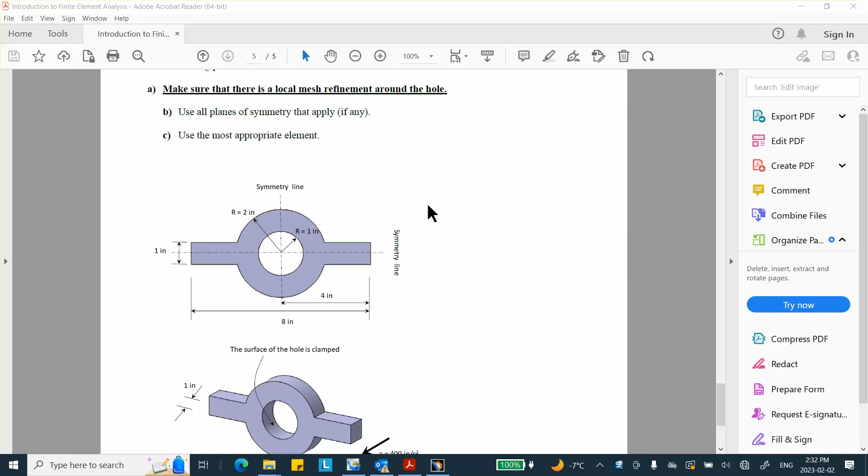Use as many planes of symmetry, use the most appropriate element. At this stage, the only element you know how to use that's appropriate is a solid element, not beam elements. As far as symmetry goes, think about this thing - it has only two planes of symmetry. In other words, you cut it vertically and you cut it horizontally, so basically we are dealing with one quarter of the geometry.

Okay, now let's go ahead and make it. As I said in previous cases, you can either make the whole thing and start cutting it, or you can make a quarter of it as you see fit, if that's what you want to do. So we start with a part file.

Immediately save it - file, save management - just like you have to do on the test, in the appropriate folder. There is a folder called Lab 5 Activity 5, so anything I do for this problem goes in there.

And on that vertical plane, I will sketch something that looks like this. You can always go and clean these up, but don't think about it too much because you can always go clean it up.

Let me see, actually, let me do the following - what's the best way of doing it? I can make a circle, two concentric circles, and then draw a rectangle and add them together. So let's see, circle, circle, circle.

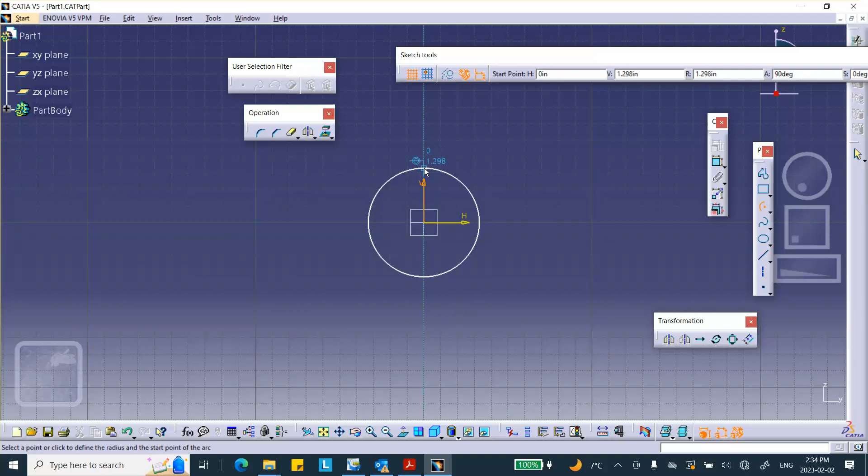One like that, that's the inside one. Another one like this. Let me try it again, like so.

Now we draw a rectangle, perhaps like this, and we're going to clean it up. Let me close this, by the way. If you want to do it some other way, be my guest, no problem. Use a quick trim to clean this up, so I'm going to get rid of this, and I'm going to get rid of that and that.

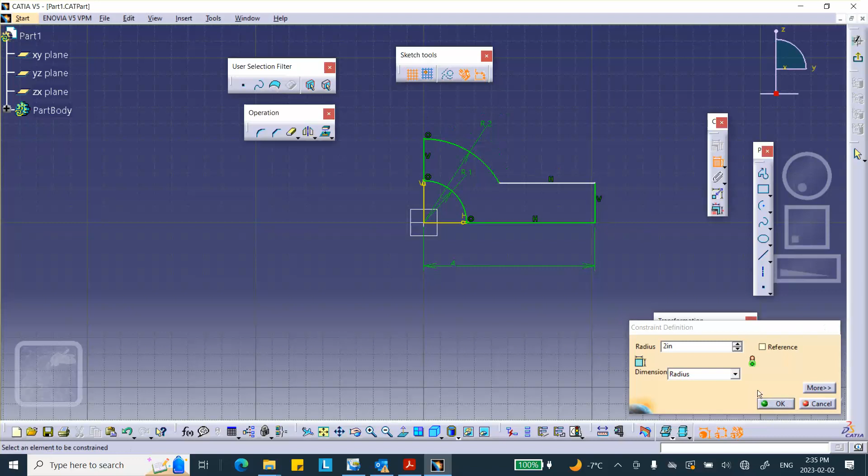Okay, let's put some dimensions here. From here to here is 4. The inside radius of this is 1, make it 1. And this outside radius is 2. I think what you see there is this, except this height should be 0.5.

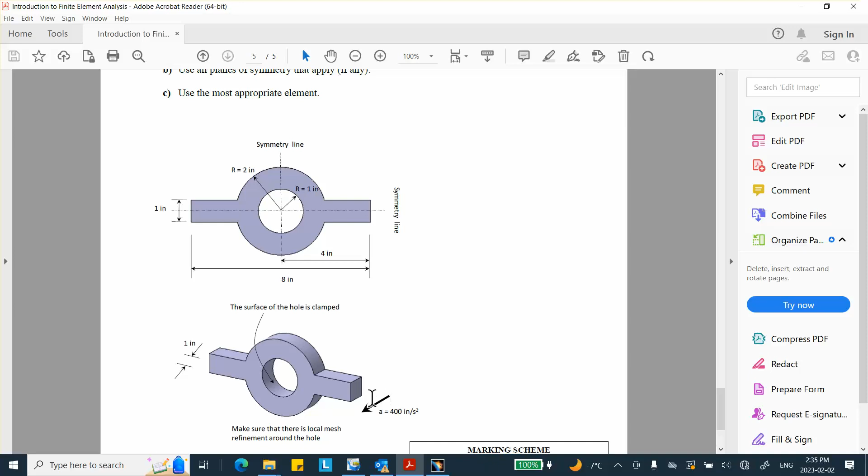There we are, exit, pad it by the entire amount, which is 1 inch. You cannot use symmetry by taking half of that thing - it's just wrong, simple as that. Think about it, it's wrong.

Good, so let's apply material properties on it - metal, steel, on that part. Okay, that's pretty much it.

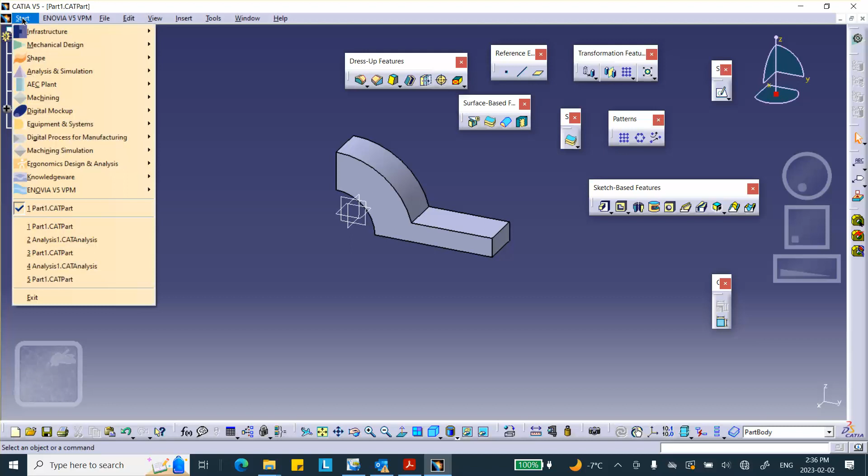So we're going to go to analysis and simulation, generative structural analysis. Let's put our planes of symmetry in different places. So surface sliders, we cut it here, and we know this is a plane of symmetry because we cut it. I put it both in the same constraints. Wait a minute, what do I do here?

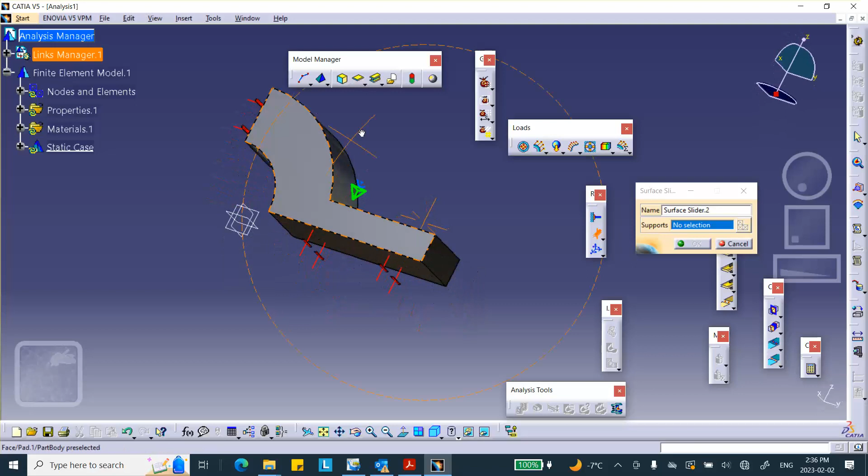Cancel. Did I have it here? Restraint, yeah, right here, two of them. Good, good.

The inside of this thing is clamped. That's what you're told. And one thing I forgot to do, it says to use local mesh refinement around the hole, so let's do that now.

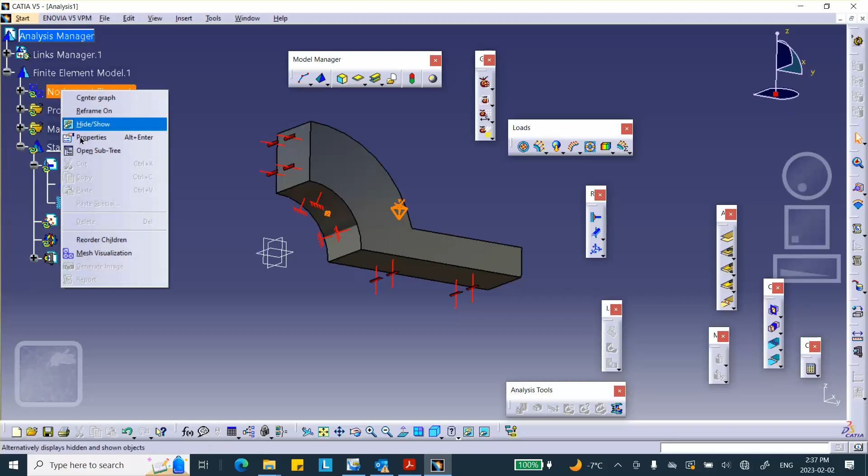This is local mesh refinement over here. If you look at your mesh, you see that is exactly the kind of thing you want. So find your mesh in this area, you can see that right there. All right, good, good. So deactivate this plot.

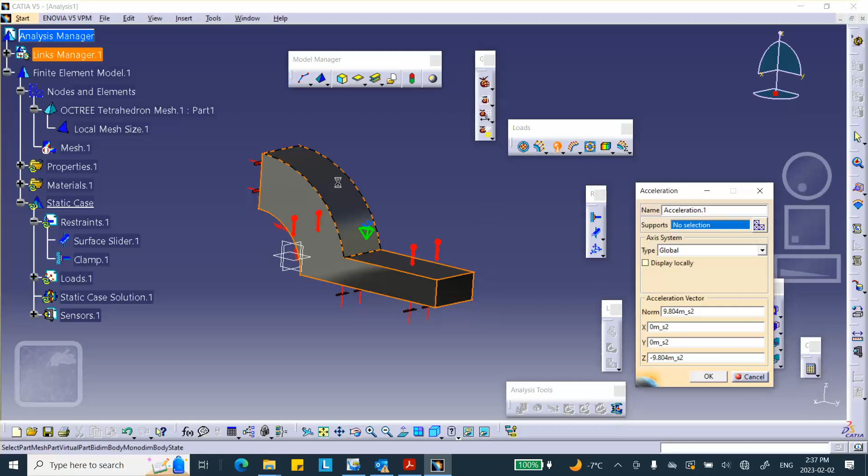Deactivate this plot. And the load is actually acceleration in direction x. Here's the acceleration, linear acceleration. It's a body force, it doesn't matter what you pick, it's going to put it on the entire object. The direction should be in the direction x, should be 0, direction x, 400 inches per second squared. That's almost a g, something like that.

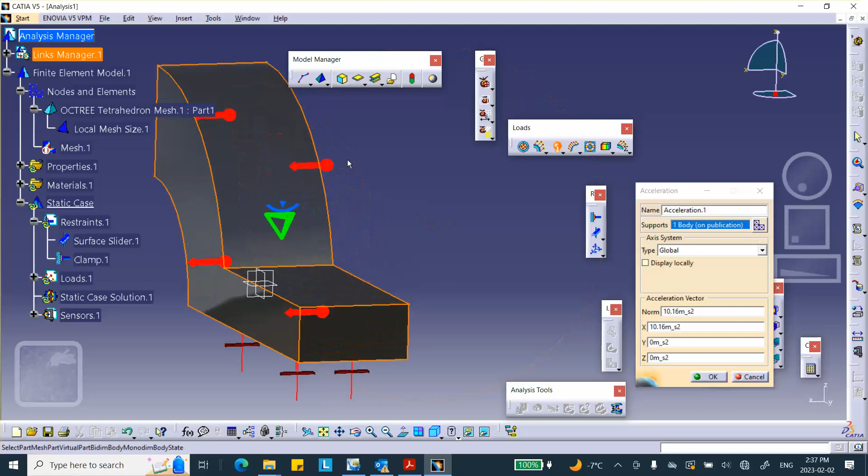Okay, very good. There we are, so it's accelerated that way. Now notice that, think about it, when it accelerates this way, actually this guy is going to bend in the opposite direction. It's bent like that. Better. Otherwise you did something wrong.

Okay, so let me save the analysis. Save management, the analysis, save as that folder - but this is the wrong folder. You go up to activity 5. Okay, good, good. And run it.

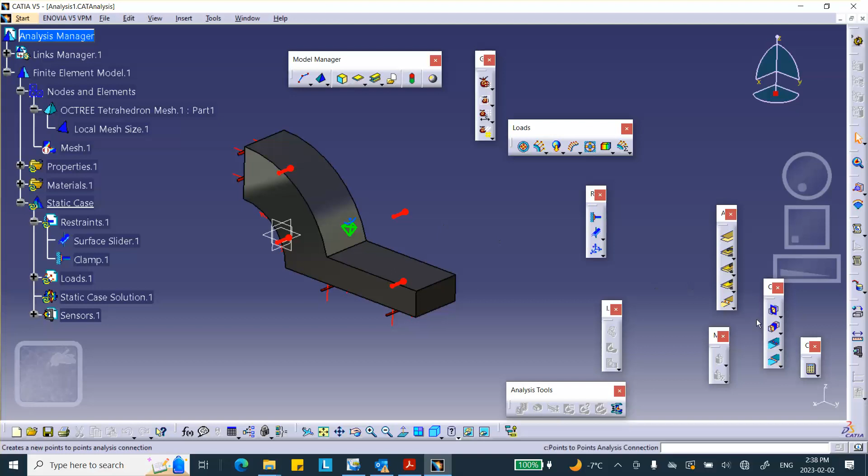This warning message, because maybe my installation, I get this thing. It says rotation is not a 3D degree of freedom, basically. That's fine, I know that.

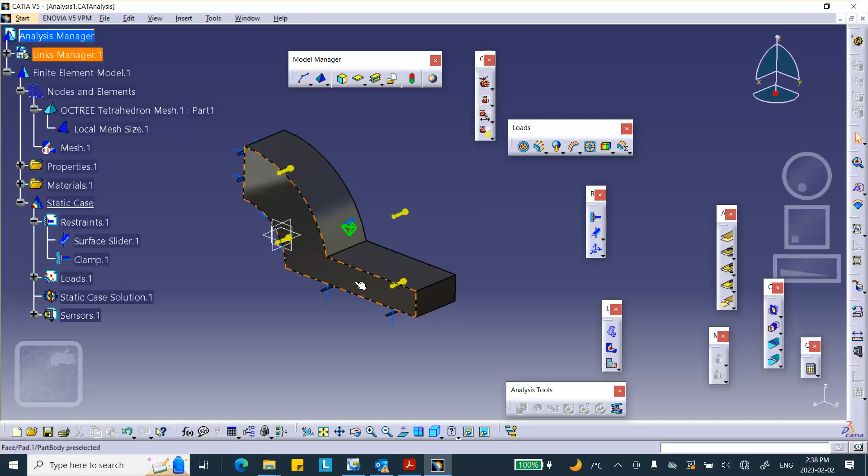Okay, so let's look at the motion. This is going to bend backwards. It should. Oh wait, hang in there. Why don't I go forward? The acceleration was in the positive direction.

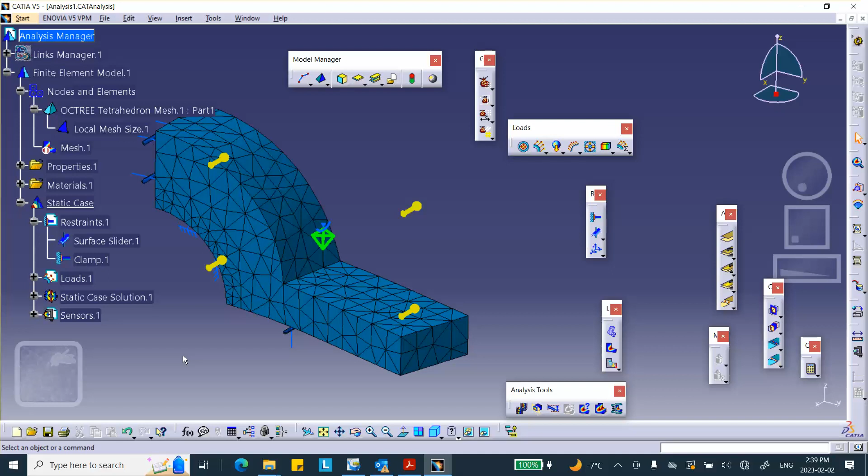I don't like that. Oh, okay, I see what's going on here. I guess obviously for this problem it doesn't matter whether it goes forward or backward, it's going to behave exactly the same way. But let me see that.

The reason I said it's going to go backward is - let's say that you were actually sitting in a car and the car was accelerating like that. Your acceleration is towards the front because you're going with the car, but you feel that you're going to go backward.

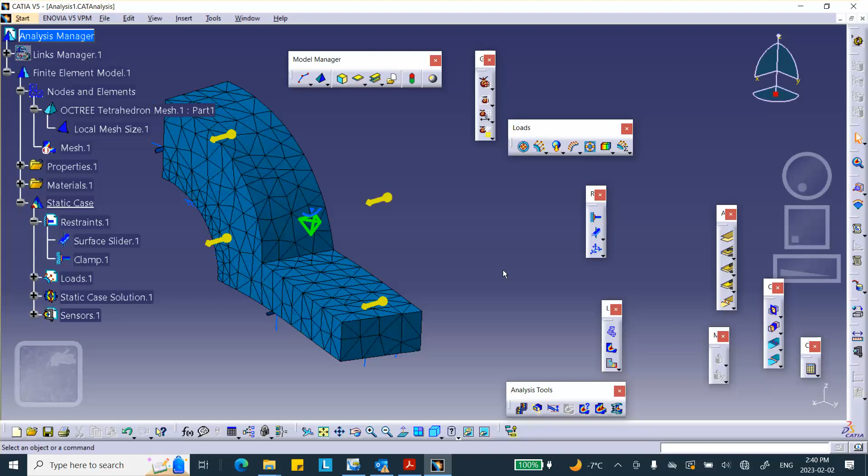Your body will resist that and it presses you against the seat. So that's okay, there's no problem here, that's all right. Okay, let's look at the deflections. It's just that I don't like the way it comes out, but that's a reality. If these points are accelerated forward, of course they're going to go to the front, they're going to go in the positive x direction.

There's no doubt about it because they're being accelerated that way. The negative reaction force, the negative inertia force, is actually what you feel when you're sitting in the car and the car accelerates forward - you're just pressing against the seat. Okay, so that's pretty much it.

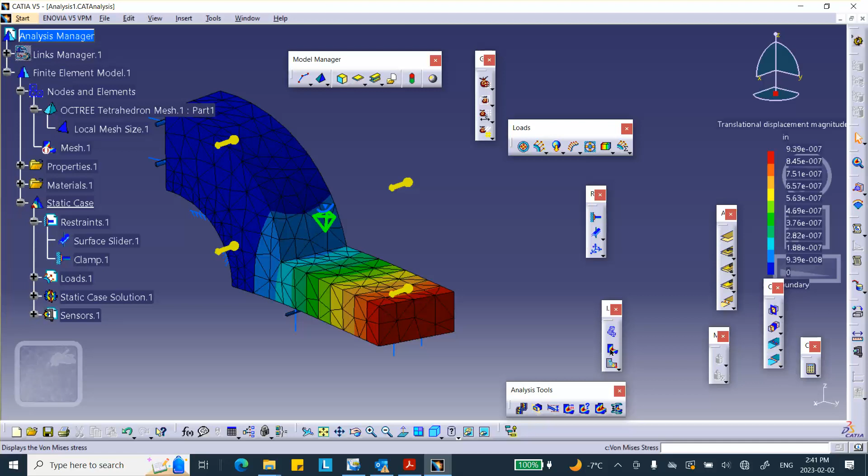If you look at the von Mises stress, needless to say, assuming that this is a good mesh - remember, it's so easy to generate good-looking garbage. You really have to do a mesh convergence study, and these are totally useless. Not wrong, it's just that it's a 1 inch thick piece of steel, and you're giving it acceleration of g's, just like dropping it, for example. So what do you expect?

Nothing is going to happen. These are such low stresses that nothing is going to happen. They're correct, but the acceleration is so low and this is so massive that basically you don't get much deformation in it. So that takes care of this last activity.